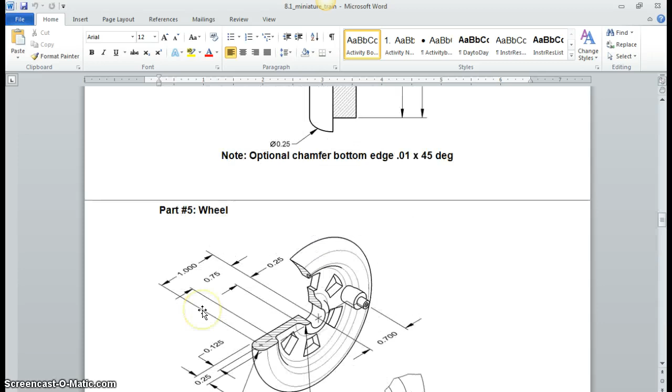So for this video, I am going to show you how to do the axle peg, which is very similar to the hitch peg, and there's another part down below, I believe down below here somewhere. But hitch peg is very similar, except it doesn't have threading on it. It also doesn't have these flats that the axle peg has.

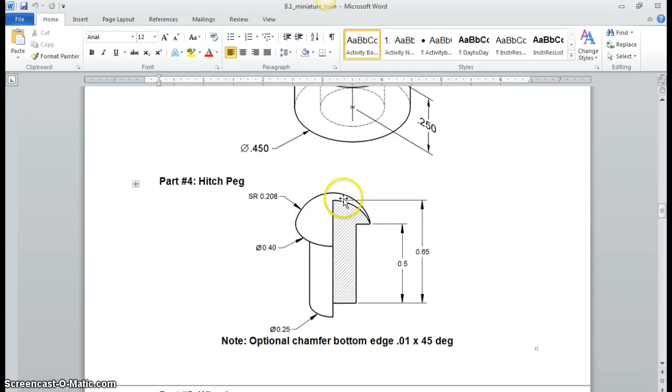Axle peg has a flat before you start your curve, and once you get to the top it isn't all domed and rounded. The top also has this flat spot on it. So it's very similar, but there's slight subtle differences. That, and we also put threading on the end of it. So let's get started with that.

So if you look at the drawing, I actually did this recording once and the audio didn't take, so it's kind of pointless to throw that up there, but I'm not going to go through the numbers again. I'll just walk through them here. So when we do this revolve, the blue outline is really where we're looking to get to in the end. So all the numbers are up here, but I'll show you where I got them from.

Like all other revolves of the other pegs that I've done, this horizontal is going to be half of the diameter given, and the diameter in this one is a little tricky, but it's given right here. It says 1/4-20 UNC by 1 with a 1/4 inch offset. So what that's telling me is 1/4 inch is the nominal diameter of this section of the bolt. So we've got a 1/4 inch diameter. I'm going to cut that in half to get my radius here.

The dash 20 UNC is the type of threading, which we'll get to later. And the by 1, or the times 1, is how long this whole section is. So the whole thing is 1 inch. This 1/4 inch offset is telling me that this last 1/4 inch of the base of the screw is not threaded. So again, we've got our 1/4 inch cut in half, so we've got a radius of 0.125. And then from there we have our 1 inch, all the way from the bottom to right below the button head. So at that point we need to go out across this horizontal to find that.

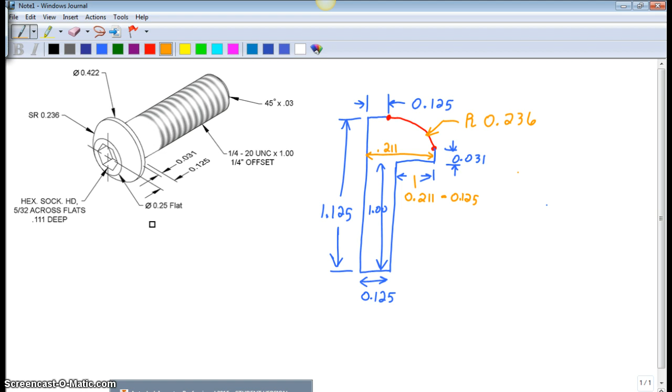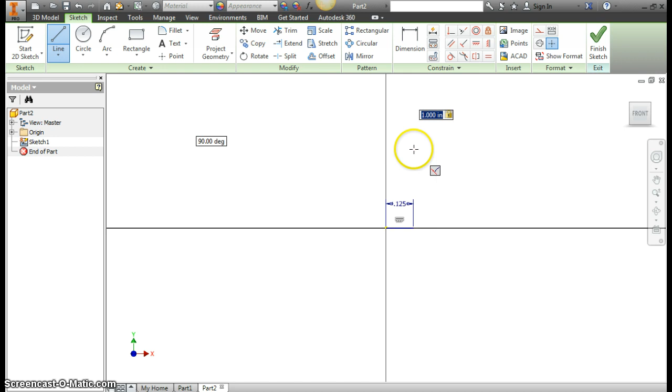So let me go back and get us into Autodesk. Alright, and I'm just going to start a new part, since again I've already done this recording, but the audio didn't catch. So we've got our new sketch, line command. We're going to start at the bottom center. We're going to go over 0.125, the radius, and then we went up 1 inch. And then our next dimension told us that we had to go the 0.211 minus the 0.125 we already went at the base.

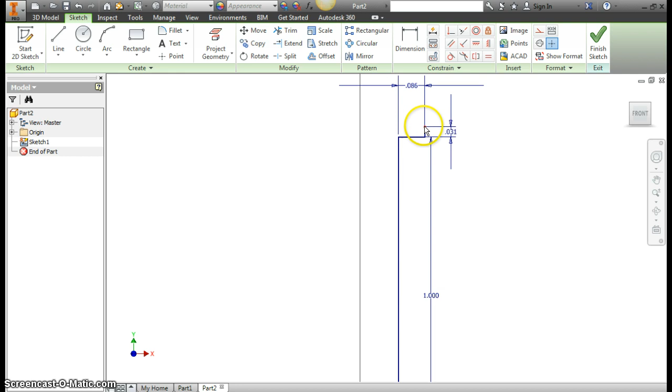From that we had to go up a vertical 0.031, so I'll type that in, and I'm going to hit OK, because that's really as far as I can go. The next step is going to be putting that arc in. So I'll go new line command, back to the bottom center. This was our vertical line 1.125, and horizontally we went half of that 1/4 inch flat, and we stopped.

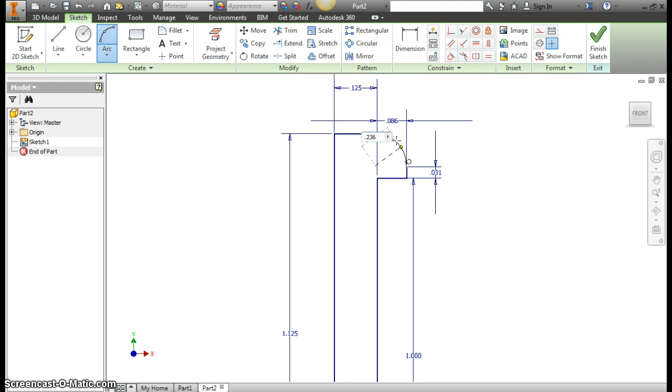So what we need to do now is create this arc, and the arc was just given as the dimension radius is 0.236. So again, I'm going to get my mouse to preview it as close as I can, and then type in the radius. And I'm going to hit finish sketch, and if you look at that, we have ourselves a closed loop.

R on the keyboard is revolve. It's preset. It recognized in blue my profile. So all I need to do is click on this center axis, and it's preset also to a full revolve. So we hit green check mark, and we have ourselves the base, what I would call a blank.

A blank is something that doesn't have the fine features to it, like this hex top or the threading in the bottom. So I'm going to stop this video here, and we will continue in part 2 as to how to put the hex on the top and the threading on the bottom.

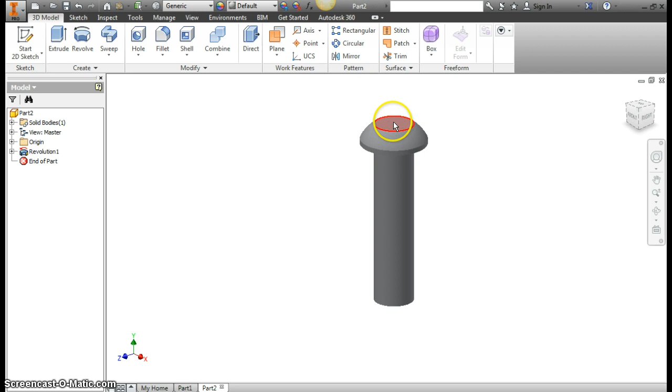Alright, as promised, this is part 2. All I'm doing is putting the threading on the bottom and the hex head hole on the top. So the first thing though we have to note is right there. Notice that there's this 45 degrees by 0.03. We haven't really seen this before, or not very often, but it's a designation for a chamfer.

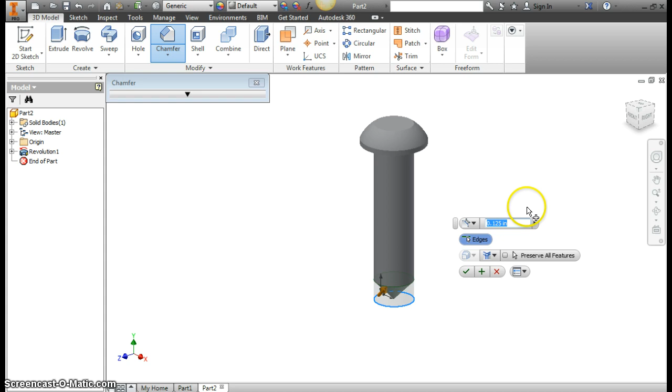If you look at it, it's like a fillet, right? A chamfer is like a fillet, but instead of being rounded off, it's just cut off at an angle. So our 45 degrees by 0.03 is our chamfer, and we got to do that first. So you find chamfer under the fillet, and we're going to select this edge to be cut. 0.125 is way too big, so I'm going to go 0.03, and that gives us our chamfer, so we're good to go there.

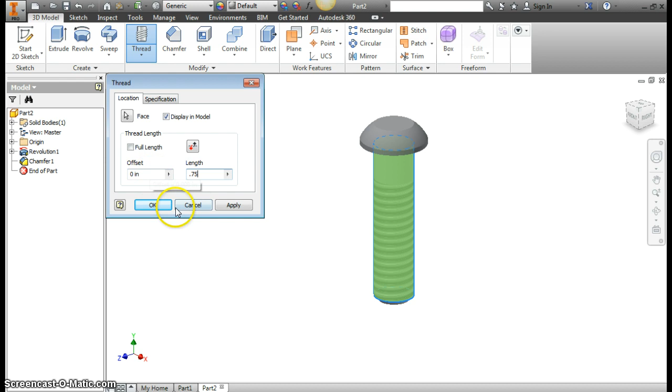Next thing we need to do is put on our threading, and threading is under hole, so we down arrow below it, find thread, and we specify that we want the thread here, and looks like we need to change this box, undo full length, and specify we only want it to be 0.75. Oops, 75. So the reason is the 1/4 UNC by 1, that's where I'm coming up with a 1/4 inch offset, is telling me that only 3/4 or 0.75 inches has threading, and we hit OK, and we have threads.

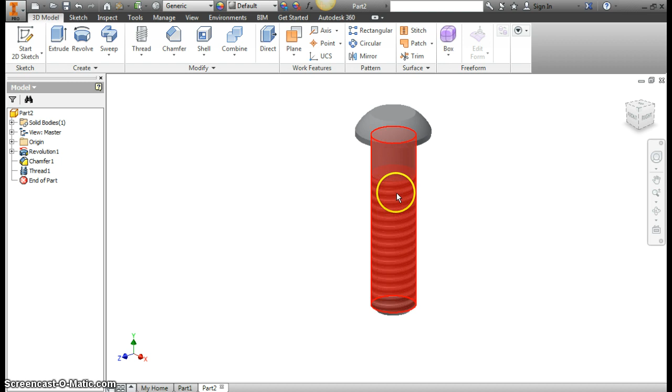Now if you have trouble getting the thread to show the offset at the top, I have found that some people have trouble, and there's no one right answer to fixing that, so you may still have to come talk to me about getting the threading to show the offset up here. But try it first the way I did it.

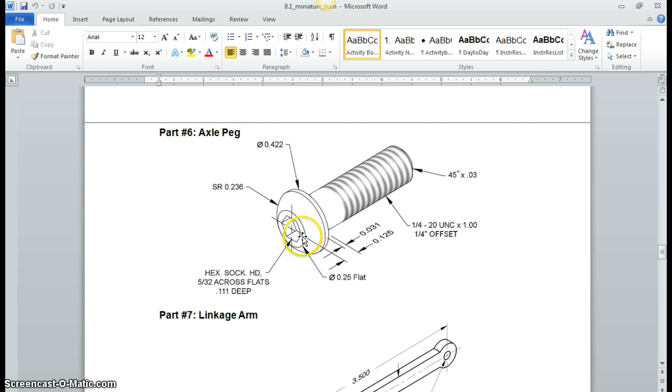And the last thing we're doing is putting on that hex top. So we're just going to create a sketch on the top, and let's review what we're doing here. We've got a hex socket head, so we need to create a hexagon that has a measurement of 5/32 across the flats. So from this piece here to this piece here, we are going to be 5/32 of an inch. And then the 0.11 is the extrusion depth.

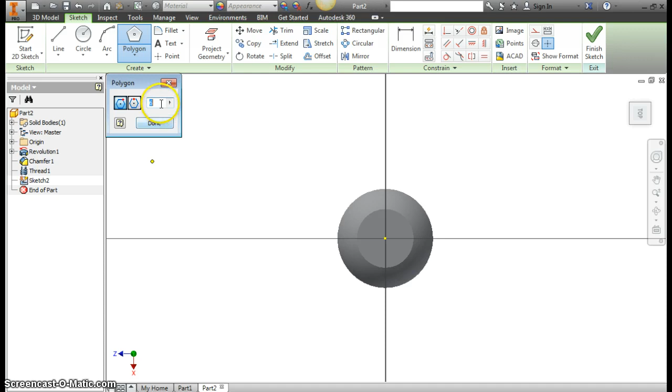So if you remember, under rectangle we can specify a lot of things, including slots, but we want a polygon this time, and it's already defaulted to 6 sides. We just need to specify the center, and then notice as far out as I go, it's creating a hexagon. I recommend that you keep your mouse along the x-axis so that we have a nice even horizontal flat that we can measure and dimension. So you just kind of come out here.

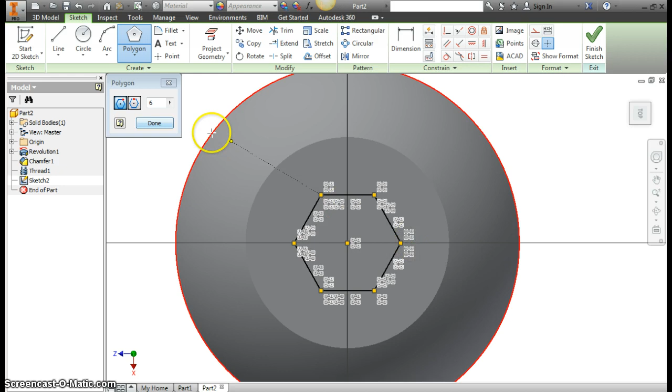It doesn't matter the dimension, because once you click that edge, you have to hit done, and those images all go away. We need to specify that 5/32. So I'm going to click on the top edge, and then down here to the bottom edge, and I click here, and this is where I don't need to know the decimal equivalent. I don't even need to plug it into the calculator. I'm just going to type 5/32 and hit enter. Then it dimensions it for me.

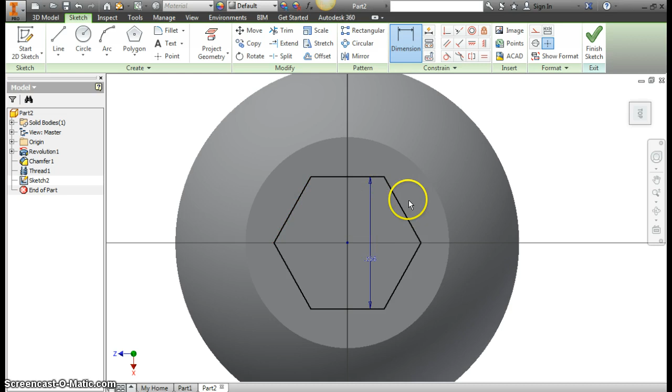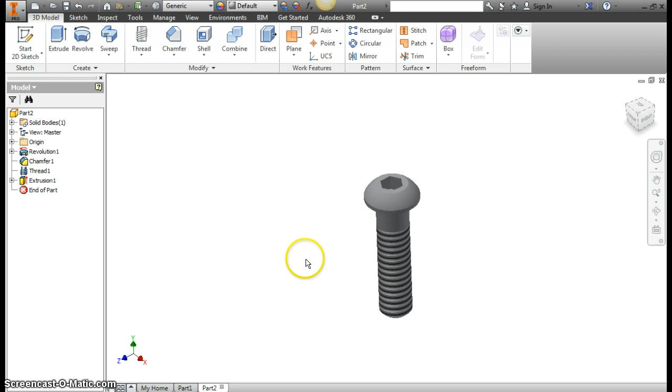I've got my shape, I've got the right size. I'm going to finish the sketch. I'm going to hit E on the keyboard. I will change direction 2. It is cutting material. I change the dimension depth to 0.111. Enter, and if we do this right, you'll see that we have ourselves a fully dimensioned part. Alright.